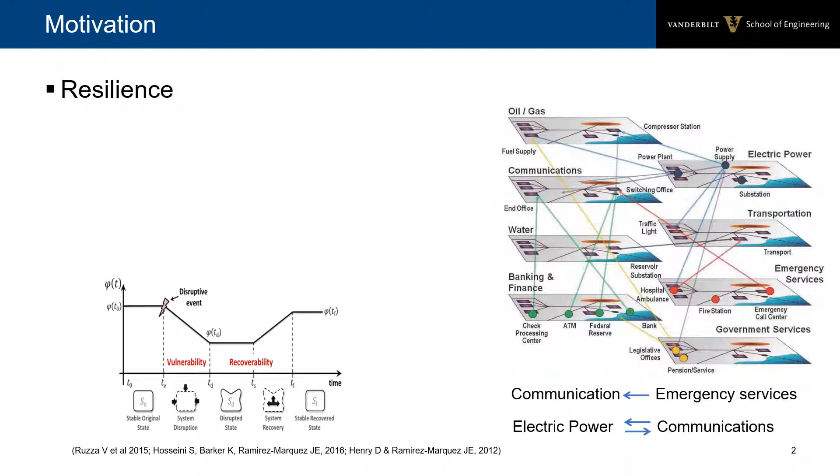One important property about the infrastructure systems is resilience, which generally refers to the ability of a system to restore its performance from disruptions. So it can be calculated by the restored performance over the initial loss of performance. For infrastructure networks, the performance is usually calculated based on the network flow or network connectivity, which is then further determined by the topological and operational attributes.

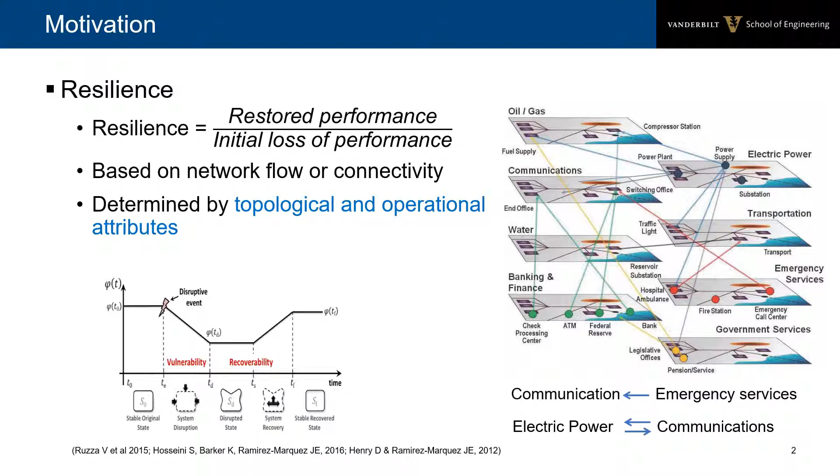However, modeling these infrastructure systems is subject to multiple uncertainties. First, the natural hazards such as earthquakes and storms are random. Second, the vulnerability of network components is uncertain as well. Third, the system topology. By this I mean the structure of the systems after the disruptive events.

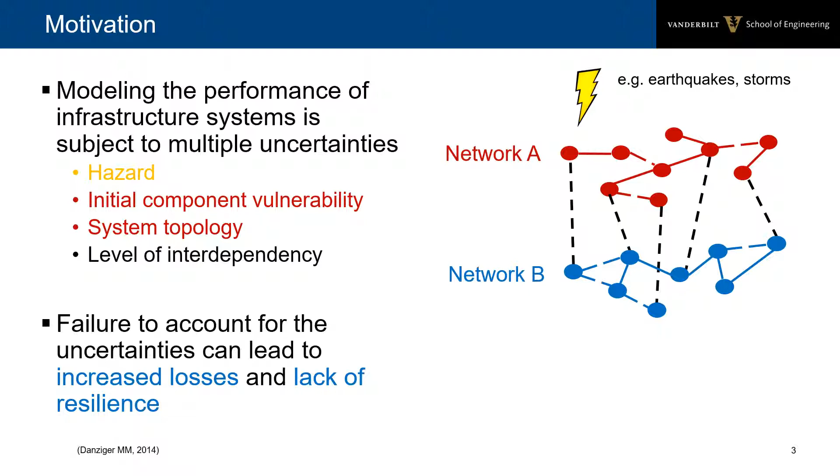Finally, the level of interdependency is also uncertain because for real-world networks, in many cases, we don't know which facilities from a network are connected to another network. And failure to account for those uncertainties can lead to increased losses and lack of resilience.

Another important concept in this study is interdependence. So interdependence is a concept that describes the relationships among different systems. The seminal work about the classification of interdependence of infrastructure networks is done by Rinaldi in 2001. He categorized it into 4 types.

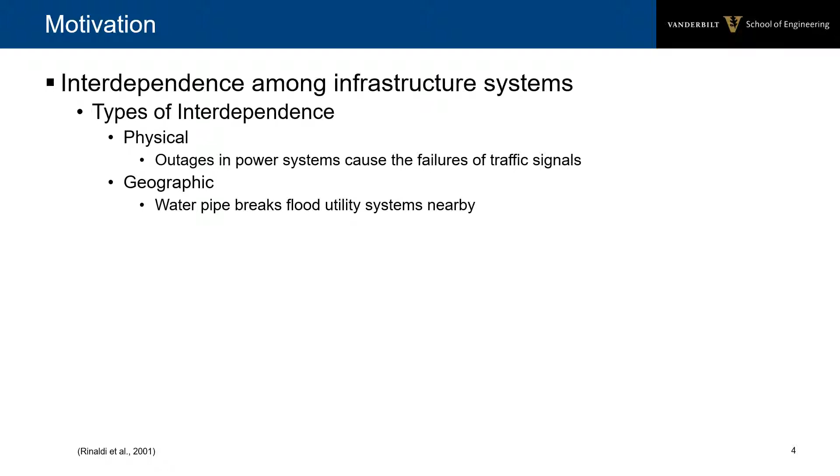First, physical interdependence. For example, outages in power systems cause the failures of traffic signals. Second, geographic interdependence. For example, water pipe breaks flood the nearby utility systems. Third, cyber interdependence. For example, electricity loss causes the interruption of communication systems, thereby affecting the restoration activities of power systems. Fourth, logical interdependence. One example would be outages in power systems lead to price changes of food and fuels.

So far, many researchers have conducted modeling analysis about infrastructure systems based on geographic interdependency. For this study, we will focus on physical interdependence as a first step to take into account different sources of uncertainty and modeling interdependence.

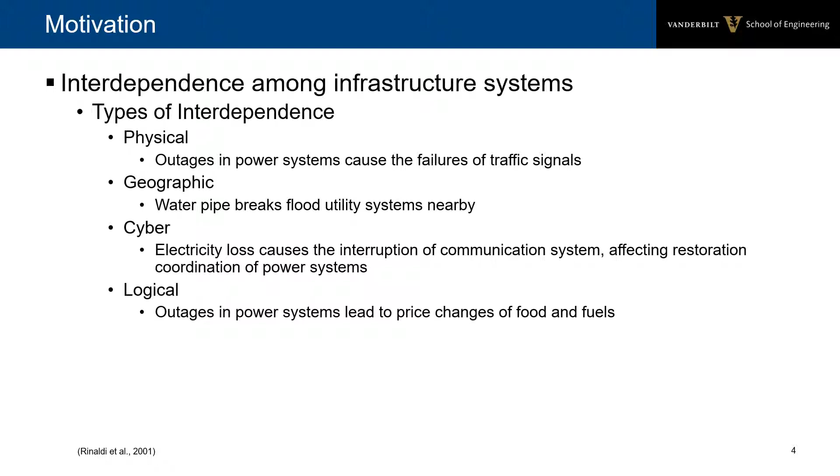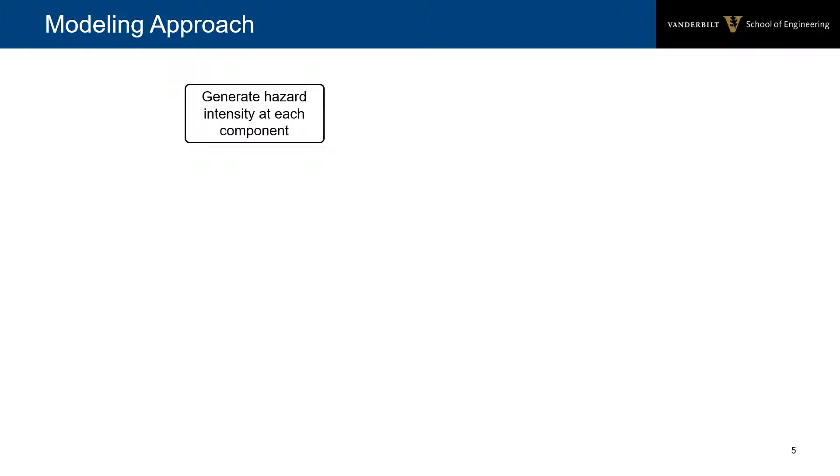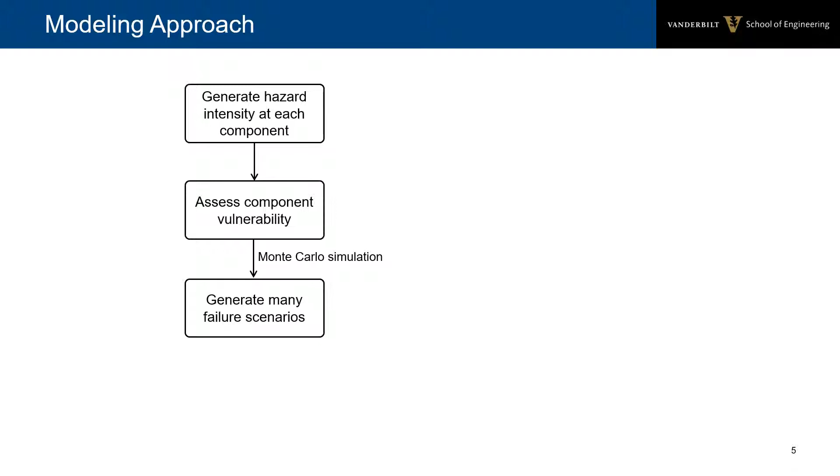So, to model the resilience of interdependent infrastructure networks, we developed the framework as follows. First, generate hazard intensity at each component, and then assess the component vulnerability. Next, use Monte Carlo simulation to generate a large number of failure scenarios. And then, for each time step during the recovery process, we identify damaged components and calculate the resilience based on network flow. And then some components are restored and we move on to the next step. This evaluation is repeated until the networks are fully recovered.

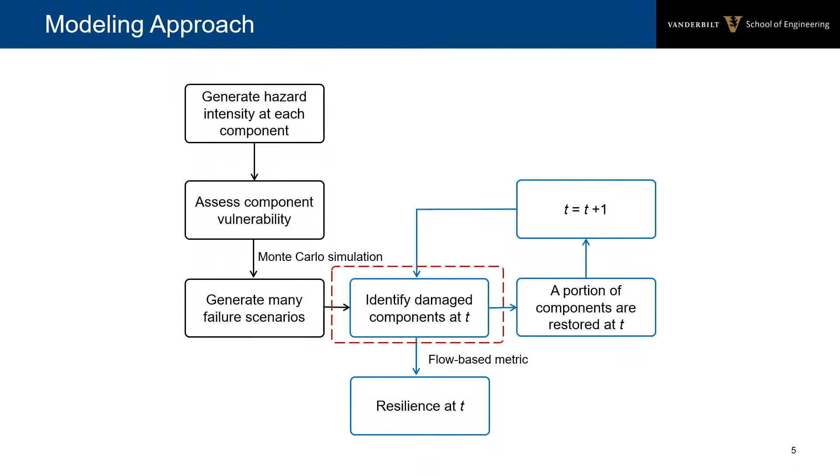For the methodology part, we'll focus on the identification of damaged components with considerations of the interdependence. In identifying the damaged components of interdependent networks, both physical damage and loss of supply should be considered. If the supply source is within one system, a demand node is functional as long as there is a path to the supply node.

However, when the supply sources are located in 2 systems, for example, here the power network and the water network depend on each other. To determine whether or not the demand node, for example P6, is functional, we should check whether or not the supply node P4 is functional. Due to the interdependency, we should also check W3, then W4, and P7.

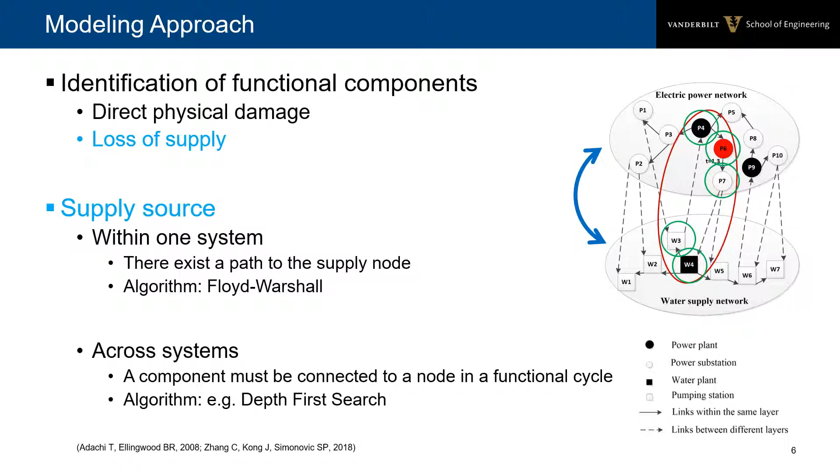So we have to jump back and forth between the two networks to determine the functionality of a node. The easier way to do this is to detect the functional cycles, and then as soon as the node is connected to such a circle, or the node is a part of such a circle, then we can say that this node is functional.

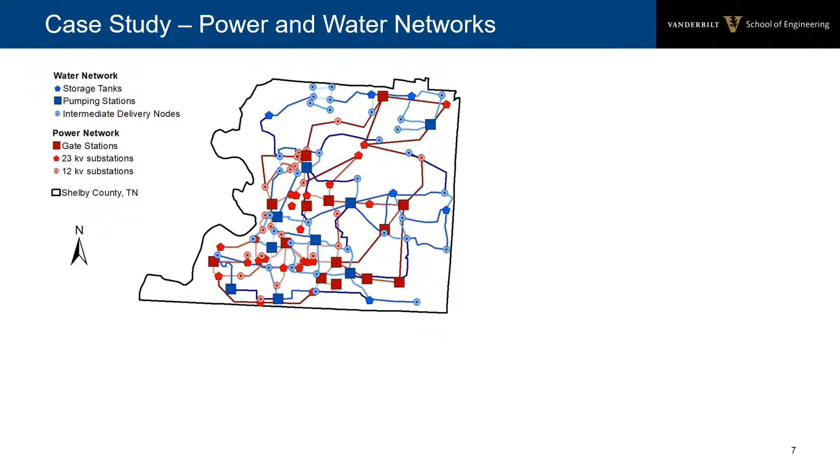We illustrate the approach through a case study of the power and water networks of Shelby County in Tennessee. Shelby County has around 1 million population and is vulnerable to several natural hazards, such as earthquakes, storms, and flood.

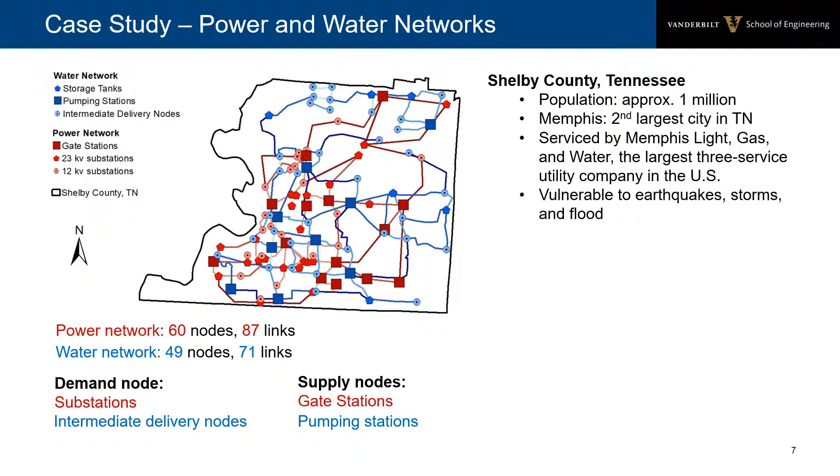In the power network on the left, there are 60 nodes and 87 links. The demand nodes are substations, while the supply nodes are the gate stations. In the water network, there are 49 nodes and 71 links. The demand nodes are the intermediate delivery nodes, while the supply nodes are pumping stations.

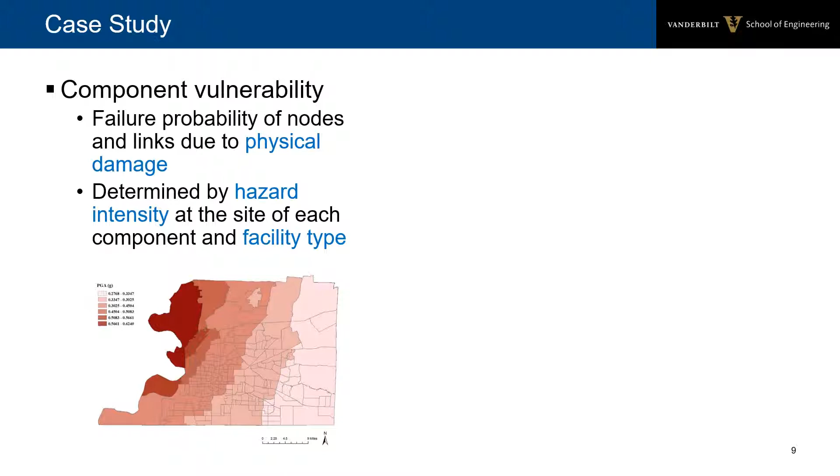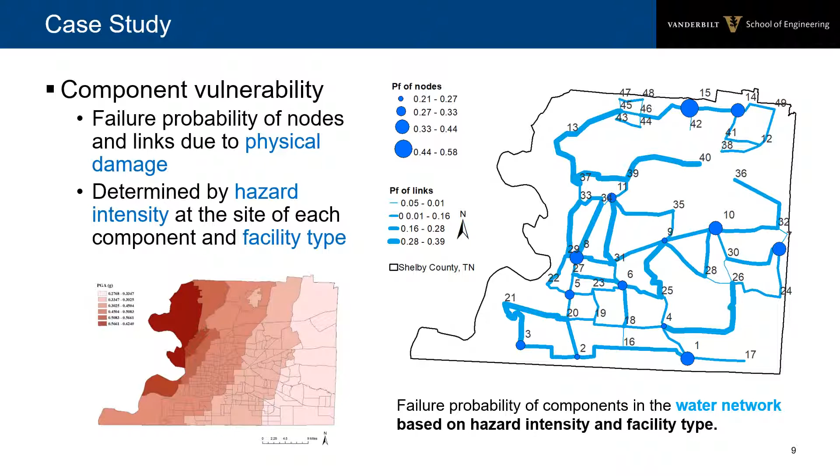The next step is to calculate the component vulnerability under earthquake. The failure probability of components due to physical damage is determined by the hazard intensity at the site of each component and also facility type. Comparing the hazard intensity map and the figure of failure probability, we can find that the failure probability is not proportional to the hazard intensity, indicating that the facility type also plays an important role in determining the failure probability.

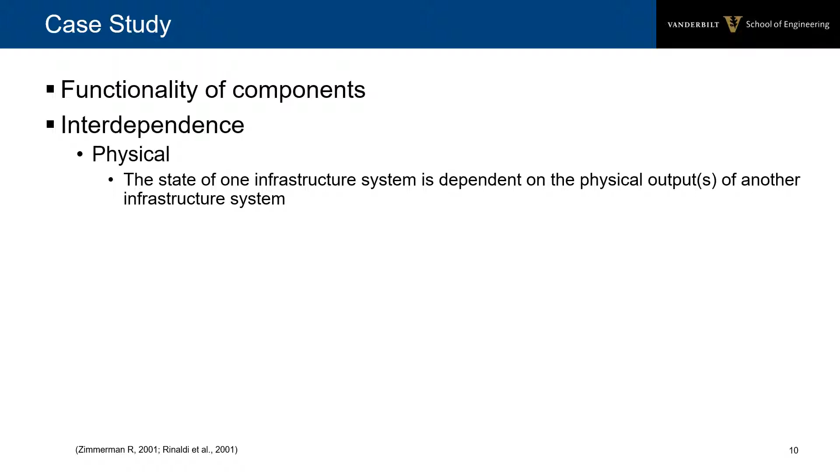Then we move on to obtain the functionality of components. In this step, physical interdependency is considered, which is present when the state of one infrastructure system is dependent on the physical output of another system. For our study, we assume that the pumping stations receive electricity from the closest substations in power networks.

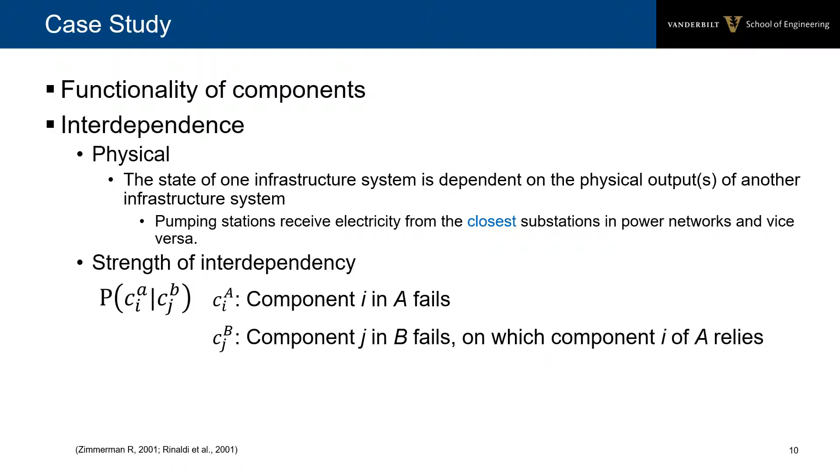Then the strength of interdependency is represented by the conditional probability of component I in system A fails when the component J in system B that provides supply to component I fails. Here we show the functionality of intermediate delivery nodes in the water distribution network as an example.

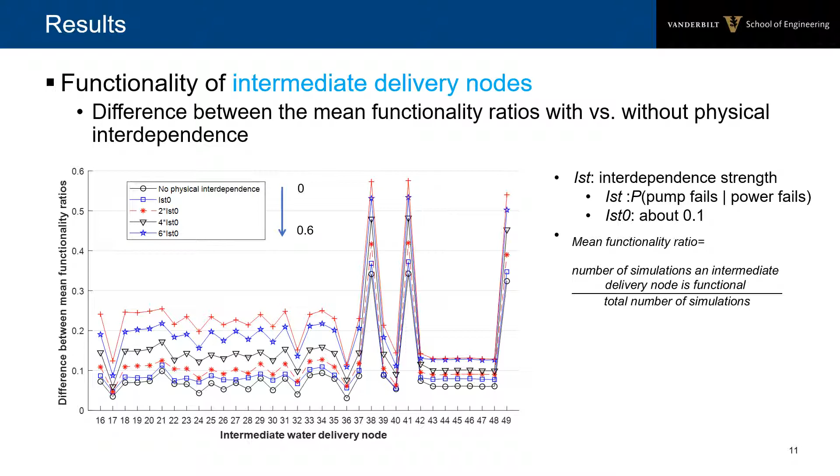This figure displays the difference between the mean functionality ratios with and without physical interdependency. The y-axis is the difference in mean functionality ratios. We can see that the difference increases when the interdependency strength increases from 0 to around 0.6.

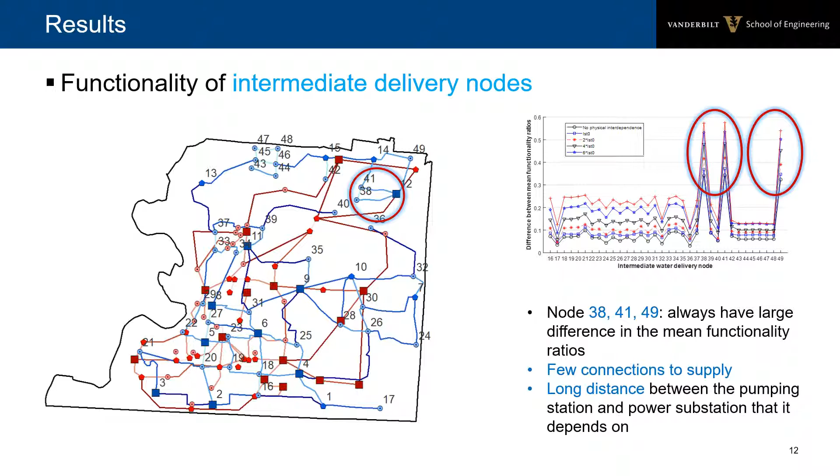From the figure, we can also find that node 38, 41, 49 have very large difference between the mean functionality ratios with and without physical interdependency. These nodes are most influenced by interdependency because they have fewer connections to the supply nodes, and the interdependency link is long and therefore it is more vulnerable.

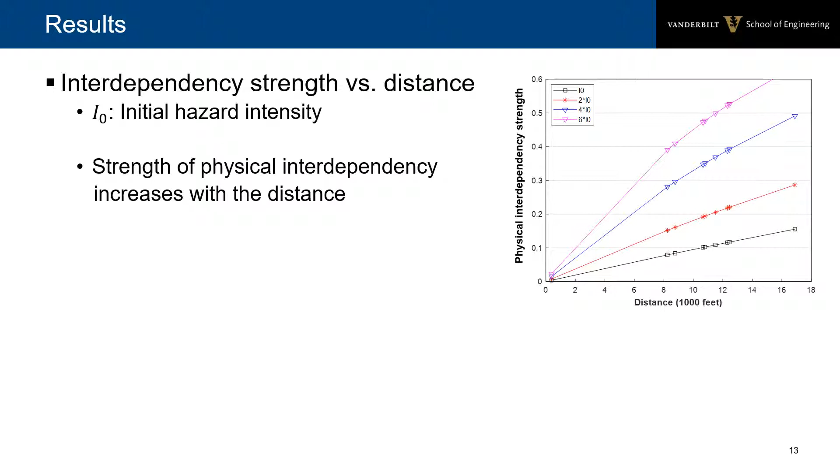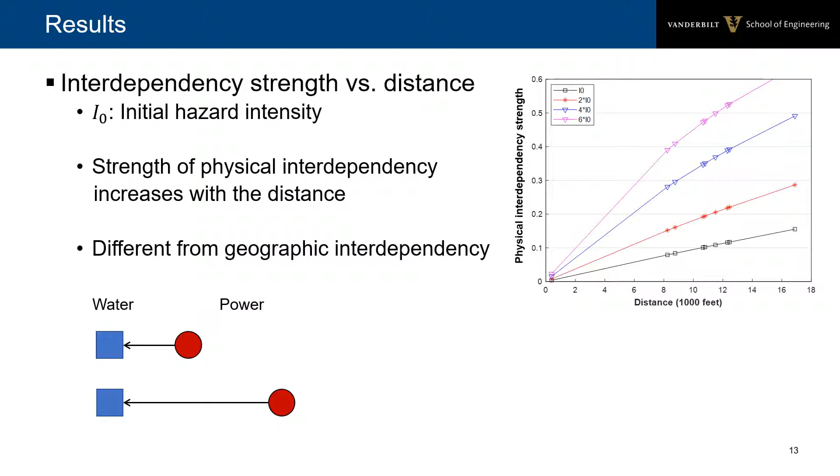We're also interested in the relationship between physical interdependency strength and distance. From the figure on the right, we can observe that under different hazard intensities, the physical interdependency strength increases with the distance. Note that physical interdependency is different from geographic interdependency because geographic interdependency decreases with the increase of distance.

To sum up, we have proposed a probabilistic framework for the resilience analysis of interdependent infrastructure systems, where we model the physical interdependency. We have also investigated the impact of physical interdependency on component functionality and the relationship between physical interdependency and distance. In the future, we're going to estimate the network flow data using network centrality metrics and then incorporate the network flow to build a more accurate model.